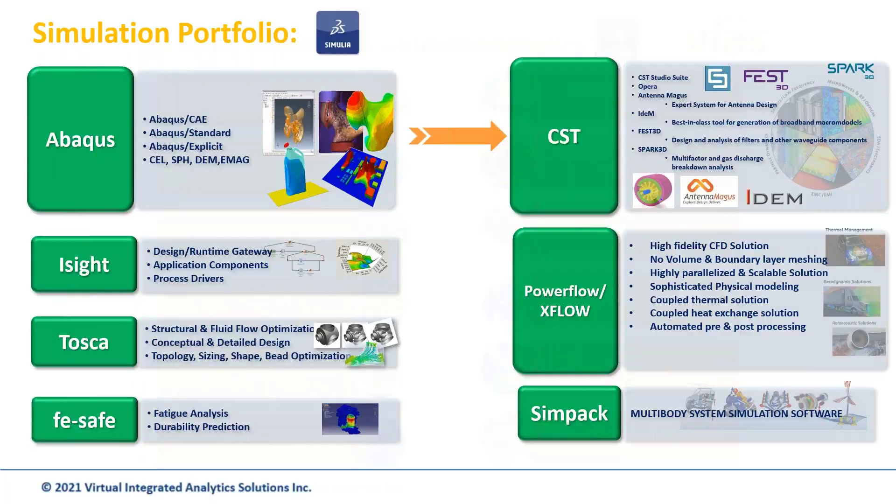So I wanted to put this slide on here because when it comes to EM simulation, the first thing a lot of people think of is antennas, and they should. So we're talking antenna and antenna array design, radar cross section. We're talking the Internet of Things, EMI, EMC, and that has to do a lot with our full wave 3D EM solvers. But I want to tell a quick story because I'm still a salesperson right now.

I'm a sales manager who kind of helps sell this product globally for Vias. I'm learning all the time, but last year I was trying to get into a 5G company, basically. And they already had one of our competing solutions. And it was really tough to distinguish ourselves, especially since they already had tools in there. And what ended up getting it done was I was on the phone with this prospect at the time, and they wanted to look at their products holistically.

They had some high power devices, and I was showing off the full wave 3D EM solvers, our time domain solver, our frequency domain solver, things to look at it just electrically. And it just so happened that he mentioned to me that he was ordering one of our competitive tools for thermal. So during the demo, we were doing about a demo a week, trying to see if we could convince them to look at our product. When we mentioned that CST had a thermal solver, he basically immediately put a stop on the licenses he was going to order for a competitive product and switched the whole evaluation and demo because he wanted to look at CST's thermal solver.

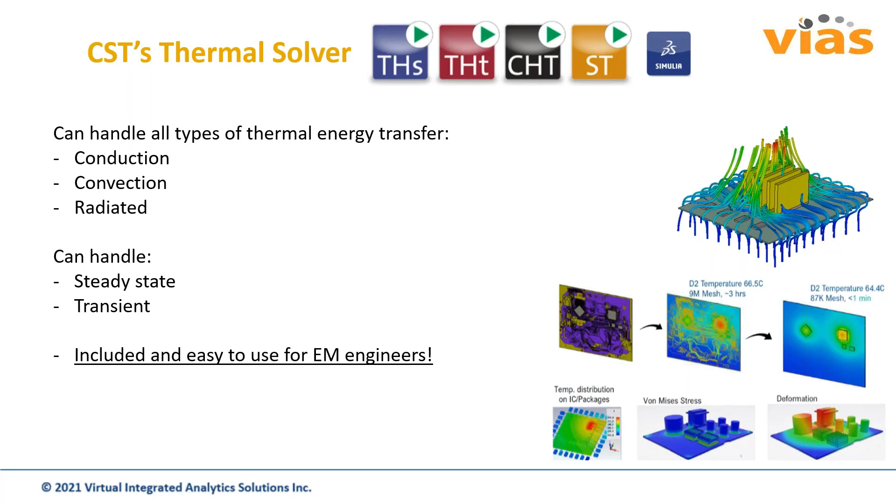For Spark 3D and Fest 3D, again, Monica is going to go into this in more detail. This was another tool that was really important for a customer I sold to before. They did RF connectors that were high power. Now, we're talking about RF filters and antennas, but it's really for any high power microwave sources. When I was still at Dassault, it was really big for satellites, because it can also do avalanche breakdown and multipaction. If you're going to send a satellite into space, you can't send anyone up there to fix it afterwards. It has to work right the first time. And these are very expensive devices. So knowing how it's going to behave with RF breakdown and avalanche is really important.

And Fest 3D comes from the same company originally, AuroraSat. To put it simply, it is the best tool on the market for waveguide filter design and high complexity multiplexers, many things like that.

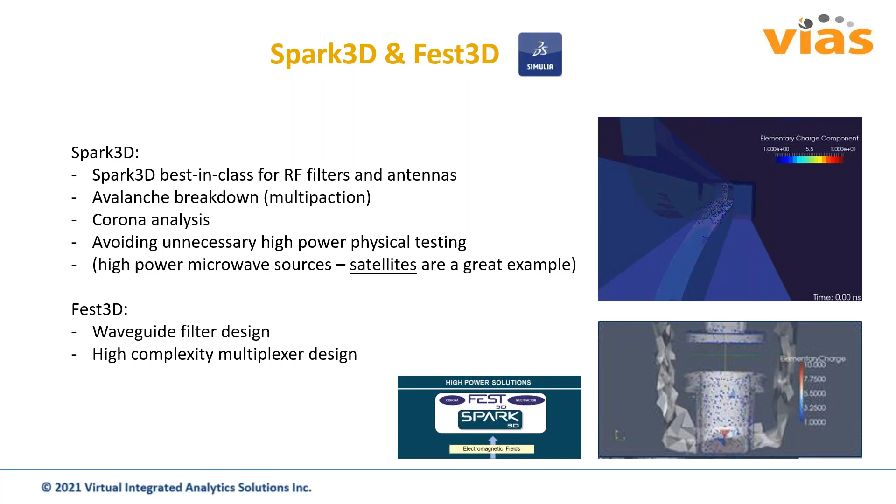And last but not least, I haven't mentioned this yet because it's one of the simpler stories, we have a tool called Antenna Magus. In a nutshell, this is a tool of about 400 parameterized, ready to go antenna models that are validated. If you're using an off-the-shelf antenna, or you're an antenna designer or RF engineer doing the same thing and making little tweaks, maybe you don't need this tool. But if you're ever doing custom antenna design where you need to get creative, where you want to throw some antenna ideas against the wall and see if they stick, this is the perfect tool.

I mean, you really go inside, you can type in Bluetooth in the search bar, and it'll bring up every single antenna model that you need there. You can type in patch, horn antenna, array, and it really is just a tool that speeds up your workflow from the very, very beginning if you're not sure exactly what type of antenna you need.

And the whole point essentially of this is we do have the full wave EM solvers here when we say Emag reimagined. But between the thermal solver that's included in some of these supplementary tools, we go so much farther beyond those just standard best in class, full wave solvers.

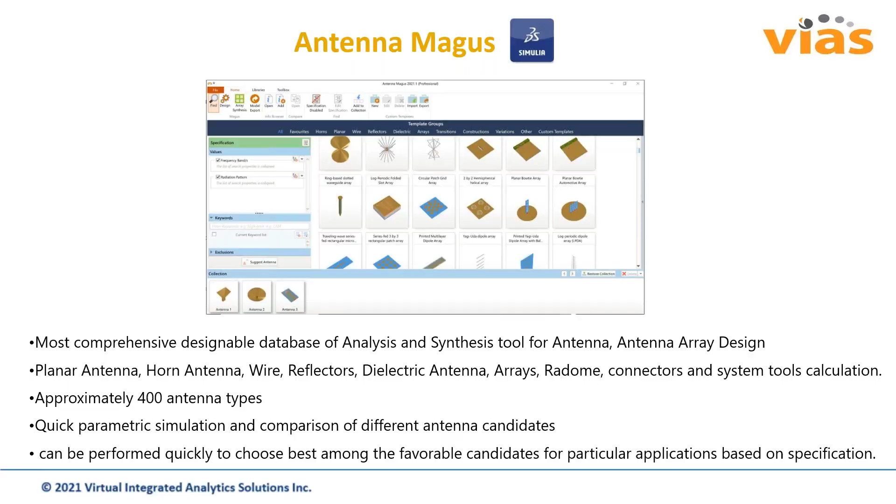I would like to also highlight two things beyond or complementing antennas. And as a cherry on the top, I would like to show you as last point the cloud compute, which recently has been made available. The two things I would like to show you beyond antennas are the feeding networks and filter design and the device thermal performance, as Derek already introduced.

Thinking about feeding network and filter design, maybe we should have a short look at what this is about. You may have heard about the public auction of transmission frequencies, which already shows you that it's a highly regulated topic. That means we have a crowded spectrum, small frequency gaps where our transmission devices should work. In order to ensure this, we need these highly selective filters, which make sure that our operation of the frequency stays within these bounds.

That means the filters regulate, first of all, what is transmitted from the antenna to the world, but also what is received by the antenna. In order to make the antennas' and later on amplifiers' life easier, it's good to filter out unwanted frequencies. Therefore, filters are an essential part of the device or equipment system. And I would like to show you in the next two slides some advanced capabilities Simulia CST can offer.

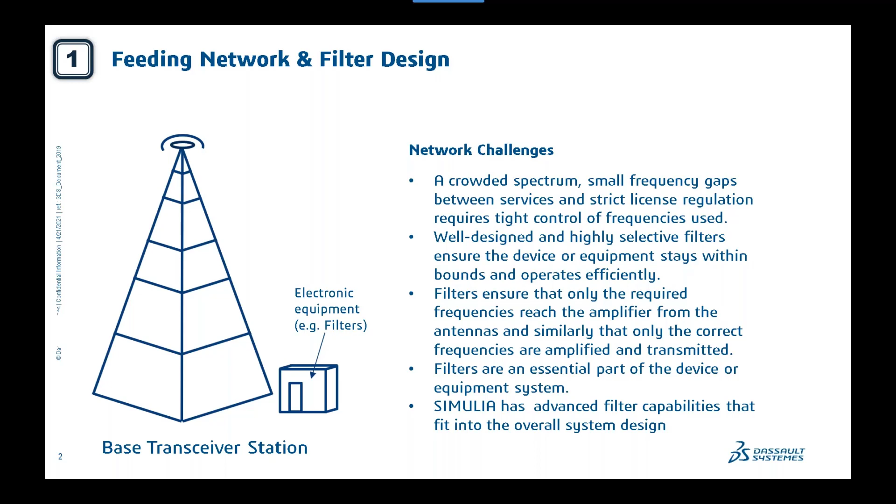The first thing is a filter synthesis tool, which actually generates the 3D geometry. So what you would do here is specify characteristic points of your desired frequency response, for example, pass bandwidth, stop band attenuation, and things like that. Then you can also specify the order of your filter and the topology.

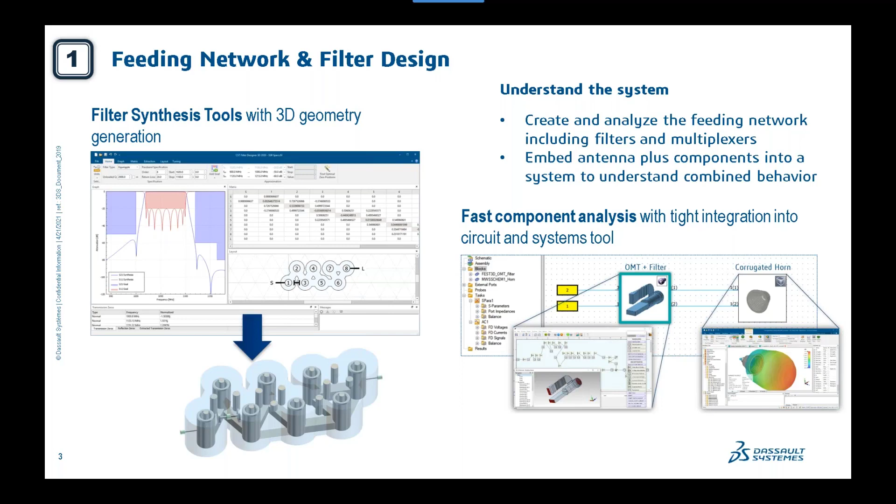So in terms of breakdown, we have different types of breakdown. We have breakdown in vacuum, which is typically important if you send something to space, or breakdown in gas, which is important if you're on the Earth.

And then last but not least, it will also give you an indication on where the breakdown would occur, such that you can maybe redesign your filter, maybe enlarge some parts, such that breakdown will not occur. Because if that occurs, it would maybe deteriorate electromagnetic performance, or the device can be damaged, and this is something you don't want. So with this combination of the different tools like Spark 3D, FEST3D, and Filter Designer 3D, you have a really unique offering on filter analysis, I would say.

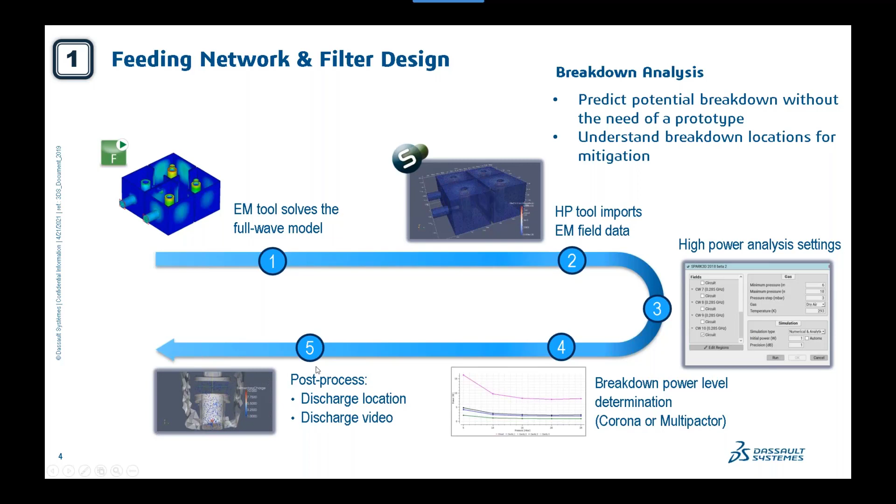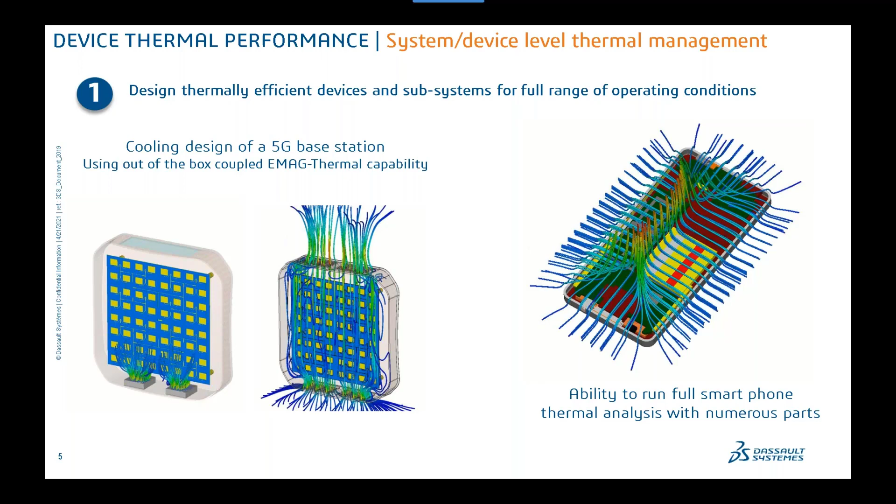On the other hand, there's another important thing. There are regulations that on the skin of this mobile phone, the temperature has to be lower than 45 degrees. So in order to fulfill these regulations, we have to make sure that this is really the case and do a thermal analysis. So you see that becomes more and more important. Let's have a look at the different levels on how this could be tackled. So there's one level which probably some of you may already use.

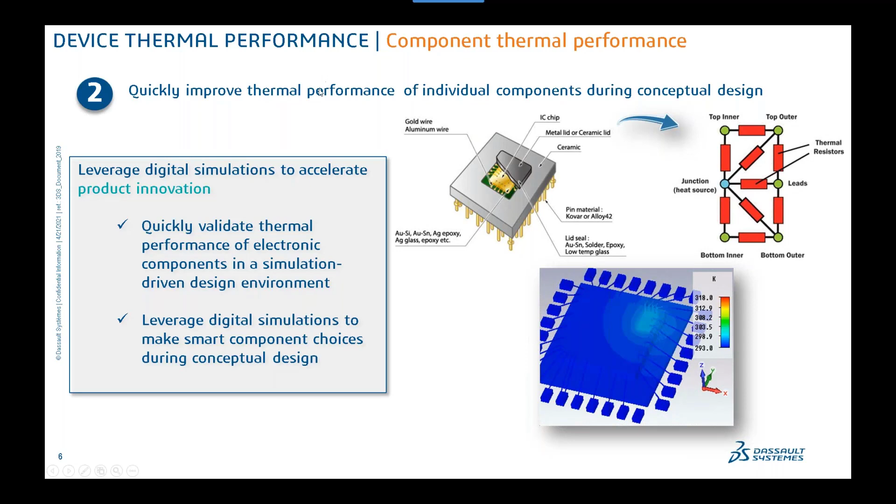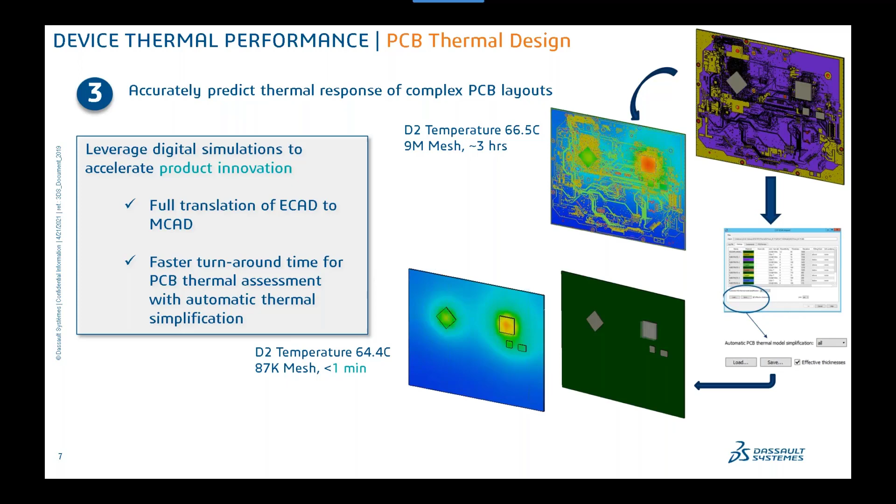Anisotropic in that way because along the layers of the PCB you would have a good conductivity, and transverse to that you would have not so much conductivity. And then you have quite an easy setup for your thermal simulation here. And of course, you can also load in other magnitudes such as power loss density from a previous IR simulation. You can just import them or load them as field imports. So it's really a very convenient kind of one-click solution to go from a PCB simulation to a thermal simulation.

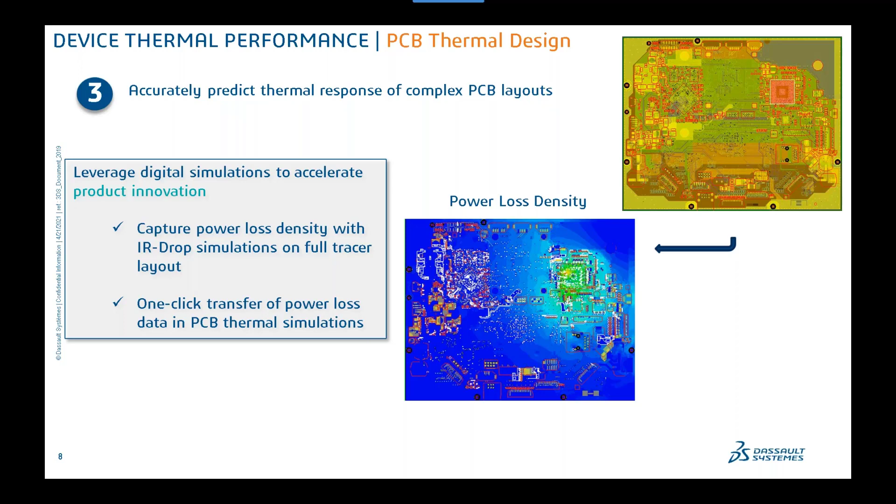Okay, then let's come to the last point, which I would like to mention, because I think we had a lot of fun finding this out ourselves, or because that has been made available recently, and that is the cloud compute, the 3D Experience Cloud Compute. And maybe as a disclaimer, this is potentially most interesting for customers who don't have time and manpower to set up their own high-performance computing system. For that, I think it's really valuable. So how does that look? Let's have a look.

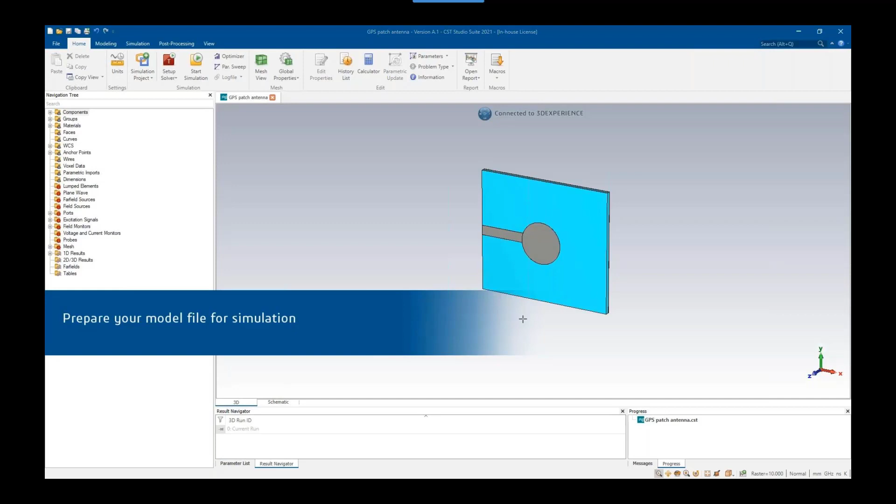So we're here in a public cloud instance where we're looking for the connector for CST. That basically starts the CST Studio Suite from the cloud. You see it opens and you load, for example, your CST file, make some changes, whatever you want to do here, and then you save this to the 3D Experience platform. That step is actually necessary to see the simulation object or your CST files later on the 3D Experience platform. So that's the so-called Powered By upload.

Now we look for the simulation manager, and that is actually the app which is controlling the cloud compute. Let's just quickly go back. As soon as you look at the simulation manager, you see that here on the left-hand side, basically all models previously uploaded with CST Powered By are listed. So the only thing you have to do in order to make your model available here is to upload it as shown in the first few minutes of this video. And as soon as you have it there, you can basically send it to the cloud compute.

Let's narrow our selection down to the GPS patch antenna. We can run it either from here or from here and send this to a cloud compute instance. I would like to stop here because we should maybe spend a few words on how you can run this in terms of license. You see here that we have tokens and credits. The tokens are basically reusable, so they are checked in and checked out, like the license features for the solvers. But there are also credits, and they are consumed. So I would say they are probably for balancing out peak compute times.

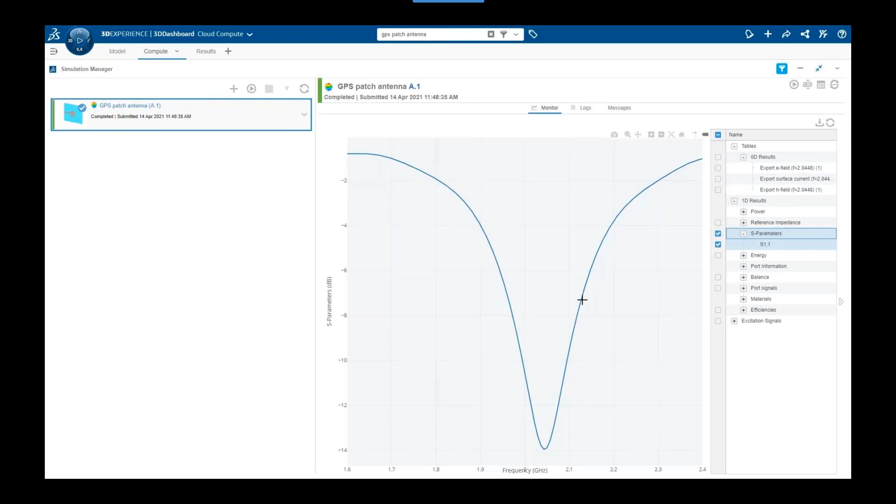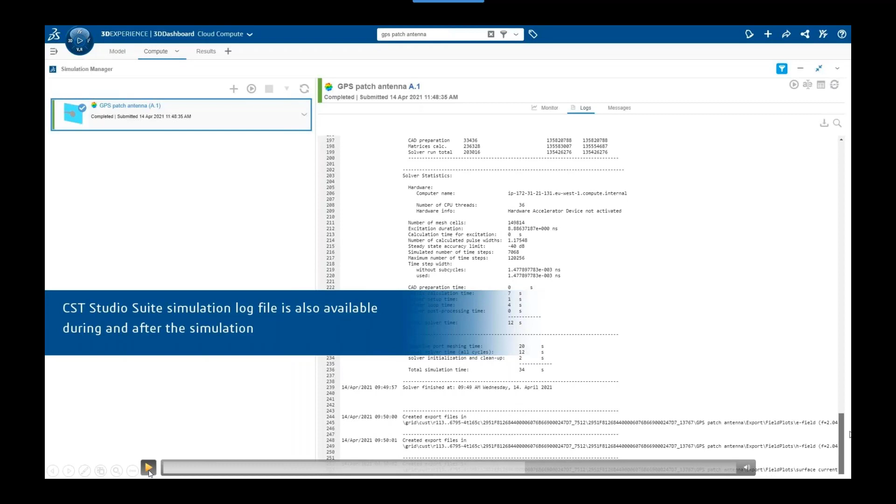And in principle, by clicking on this update button, you could get intermediate results if you have a long-running simulation. But here we have a quite quick simulation where we get directly the results, like 1D results, like port signals and energy and so on in this simulation manager. You get also the log file, which tells you, first of all, where it was calculated and also what hardware was used and so on, as you might know from the CST simulation.

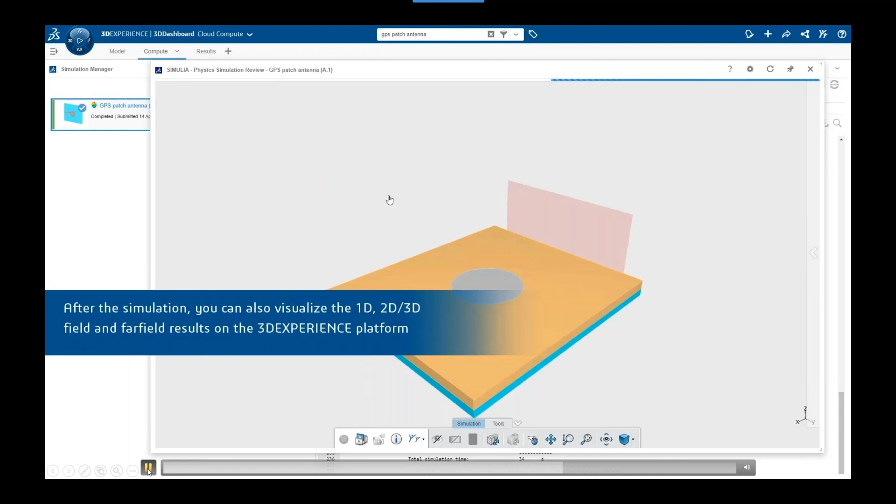And you can also look at it in Physics Simulation Review, which is actually quite cool. This is a web app, which is available on the 3DEXPERIENCE platform, so in principle you can also look at it from your mobile phone if you want. And in order to look at these results, you do not have to have the CST Studio Suite open. You can look here at 0D and 1D results, similar to what we've seen before, the S parameters, and if we want, we can also look again at the port signals and energy and so on.

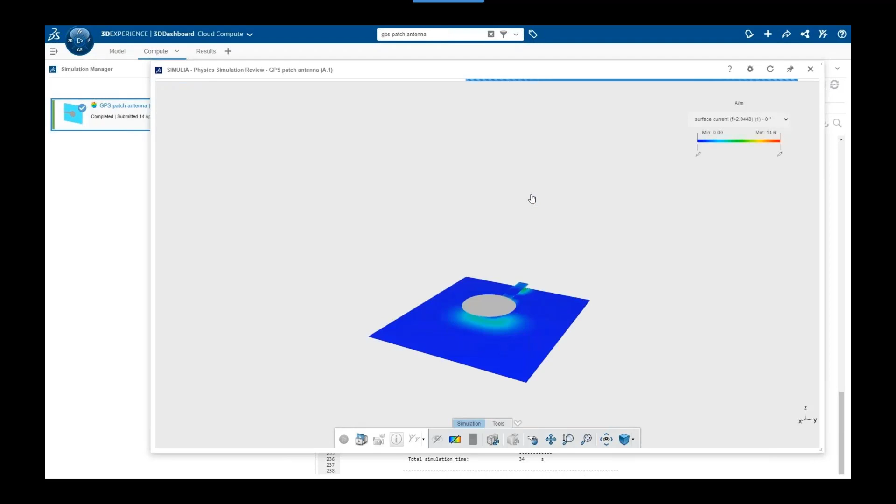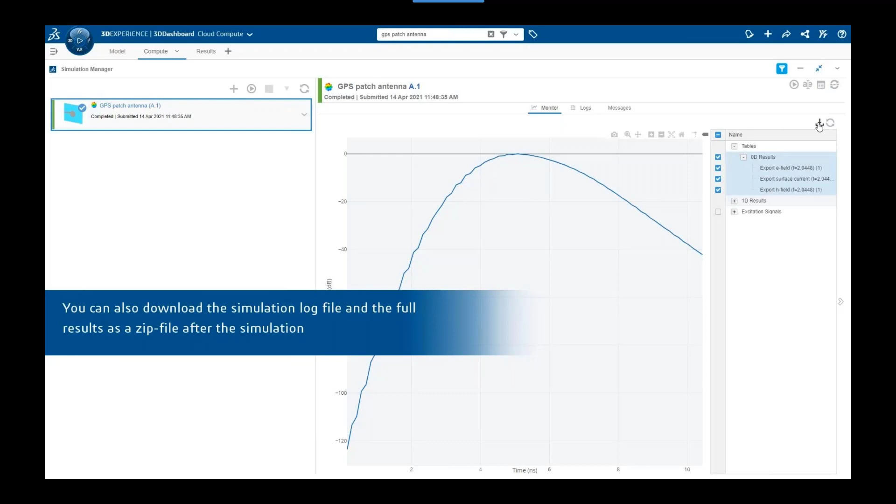But we can also look at the far fields, as you can see here, and at other customized results, as for example, the surface current here. And last but not least, at some point you might want to have the full CST data available in order to open it there, and then you can download this to your hard disk if you want it.

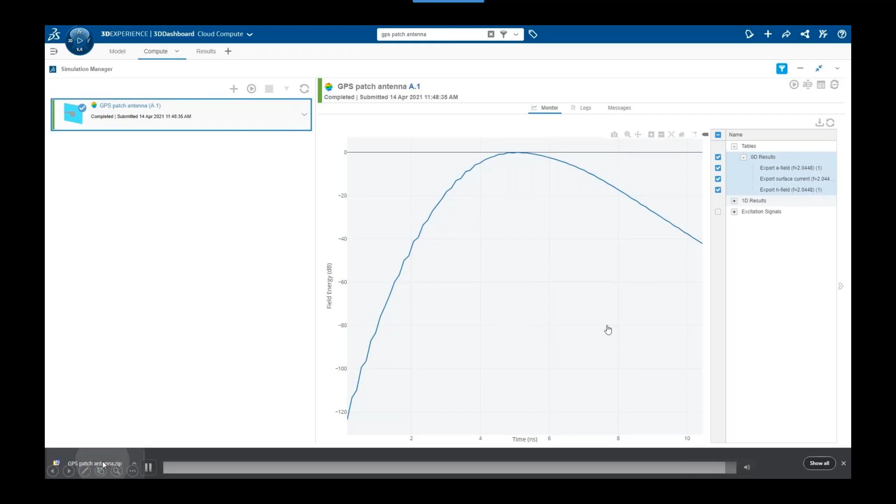Well, thank you, Derek and Monica. It was very, very interesting. We have a couple of questions that some people have put up. One of the questions is: is the thermal solver part of CST, or is it a different tool with a different interface? Derek?

Hey Lou, thank you for the question. That's a good one. So the thermal solver is included in the base package of CST, and it's not a different interface. It's a nice ribbon GUI. At the top, you could be switching between your EM solvers, but really, if you're doing some electrical or EM analysis, when you're done with that, you literally just go to the top, click the drop-down menu, change it to thermal. It's super easy. It's right in the same tool. It's all native.

That's terrific. And we have another question. On the same lines, are Spark3D and FEST3D included also with CST Studio? I hope you don't mind if I take this, Monica, just from the sales side. No, it is not included. In the base package, we include a lot, but those are some specialized tools, so you would have to add that on, which would have a cost.